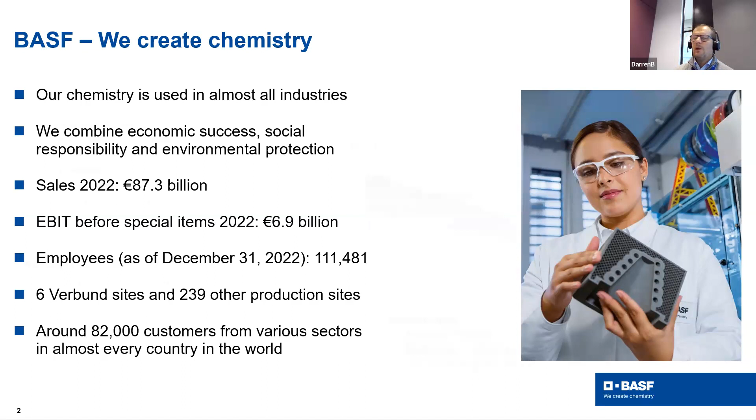So I wanted to start with the history of chemistry and the chemical industry. Chemistry has always adapted to the raw material changes that we've had. Pre-industrial, we had soap from soda ash, potash from burning plants, and then early industrial chemistry with coal, making ammonia from synthesis, and we're making ammonia and hydrogen today from different sources. Then post-war, crude oil, moving into the fossil fuels, and now natural gas. And what do we want for the future? We're talking today about changes away from fossil fuels into renewables: hydrogen, other renewable carbon resources, the energy transitions Jeremy talked about, nitrogen fixation, and which are the right technologies.

And I think Jeremy summed it up at the end: how do we know we're on the right path? So like Shell, BASF is investing in many different technologies because we don't know which one's going to be the winner in these energy transitions and defossilization. There's a lot of early stage research to see how we get to net zero by 2050, and which technologies are going to be there. It's that adaptability to raw material changes. The chemical industry has always gone through it over the last 150, 200 years, and we'll continue to adapt to meet the requirements that industry wants.

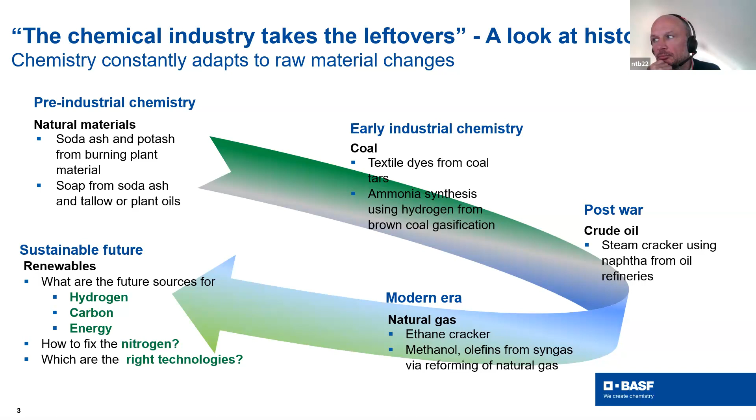And why have we done that? As you see here, synthetic indigo dye was the founding of BASF, right through the different chemistries I talked about: dyes, fertilizers, plastics, healthcare, and moving into different system technologies. How do we move away from fossil carbon into maybe renewable carbon, and how do we meet the challenges we've got? We have 8 billion people on the planet: how do we feed them, clothe them, make sure they have clean water and everything to live in the world today, while also meeting the environmental challenges and using chemistry to do that.

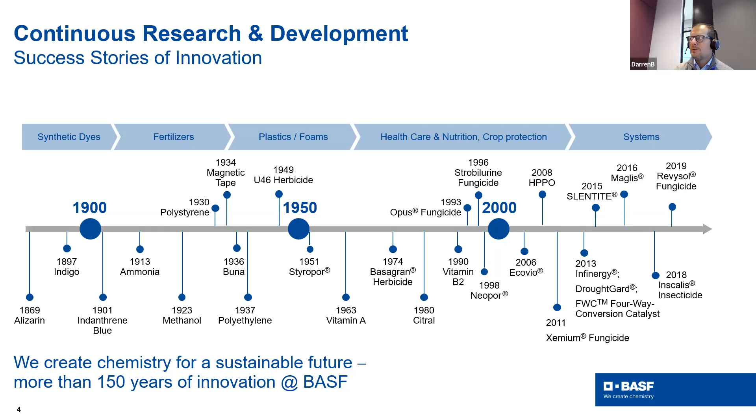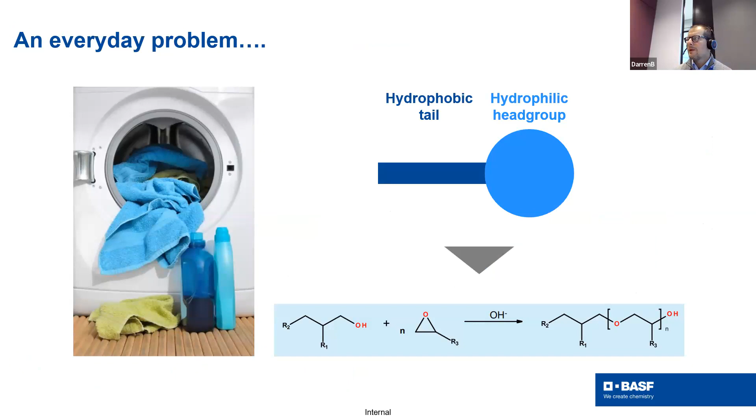And that's a really, really big challenge. And what I wanted to show is this as the everyday problem. So here we have a cleaning liquid, which contains a surfactant, hydrophobic tail, hydrophilic head group. And where does that come from? What are the processes that it comes from, and the challenges that we have to meet in our supply chain? And so those surfactants are solved via highly complex value chains that we have today.

And you see here crude oil, natural gas. And they go through the changes we make in terms of naphtha, ethane, right through to ethylene, propylene, and as we see, right the way up the complex value chains that we have in our production sites. And that's good. And you say, well, how do we replace those? Actually, it is quite difficult because these are long-term, efficient production sites, and we need to then say, how do we then replace the crude oil?

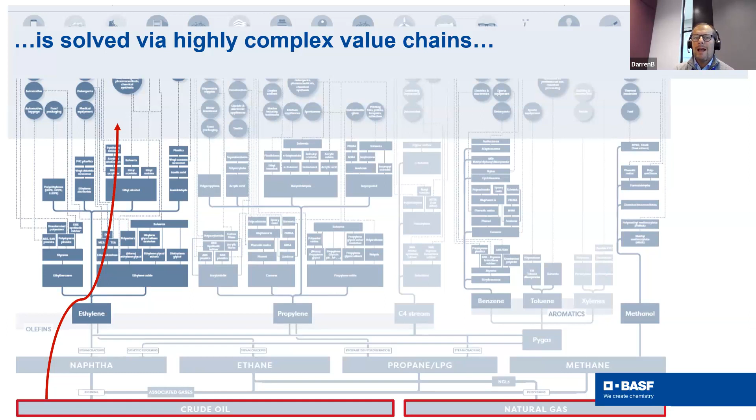How do we replace those value chains across the industry to meet the demands? And actually, it's okay where we do the fermentation technology, but how do you scale that up? And that is a really big challenge. So one of the areas we looked at is those alternative renewable chains. So this is what we call our chemistry.

And on the right, you've got the fossils, the crude oil, the natural gas that comes into the bottom to make the toolbox and the products we have every day. And then we've said, okay, we need to move away, but where can we build those value chains that meet the requirements? And so we have then looked at renewables, and on the renewable side, we've got the carbohydrates, the proteins, the triglycerides, and actually they're good, we can replace, but can you do it at volume?

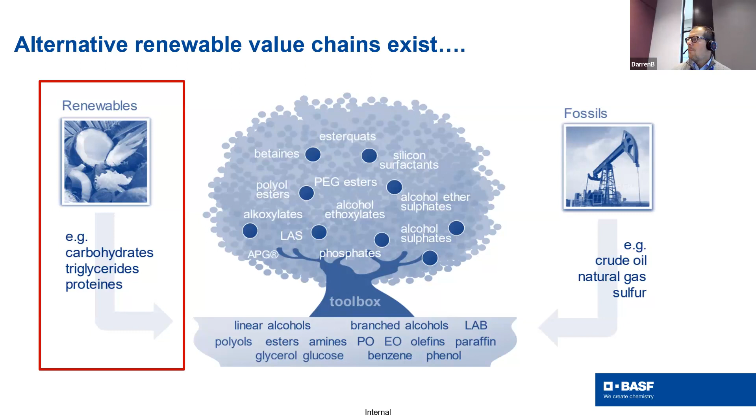And when you're looking at that, palm oil and other renewable resources have their own challenges. These are natural products, and they need to prove the efficiency. So can you make these processes as efficient as the fossil fuel that we have today? And they're the challenges. So to meet all of those in terms of the conservation, the traceability, making sure that we don't take away land that we need for food, how do you transport it, how do you protect the environment. And so these are all challenges that we have in terms of the defossilization within the chemical industry that we can meet.

So our processes, as we showed in one of the first slides, have been built up over 150, 200 years, and are very efficient supply chains. And now we've got to say, actually, how do we take that apart, or how do we then make sure that we can meet the requirements of the world, but also in a sustainable way, and actually at a cost that people can afford.

And this is the three-legged stool. So one is the environment, so we make sure we protect the environment. The second one is the social aspect, so the people. And the third is actually we still need to make money to reinvest in the new technologies. So those three areas have to be filled. And if one of those legs of the stool is not fulfilled, then we're not going to make those processes.

So from a BASF perspective, in terms of our Verbund sites, how do we replace? You've got the four big areas of mobility, energy, waste, nutrition that feed into our processes. And at the top, you've got our traditional crude oil, natural gas, coal, and how do we then move away? Because they make the chemicals that we have today, can you replace them with the products I said before, the plant oil, the cornstarch, but then are you taking those natural materials away from the food chain?

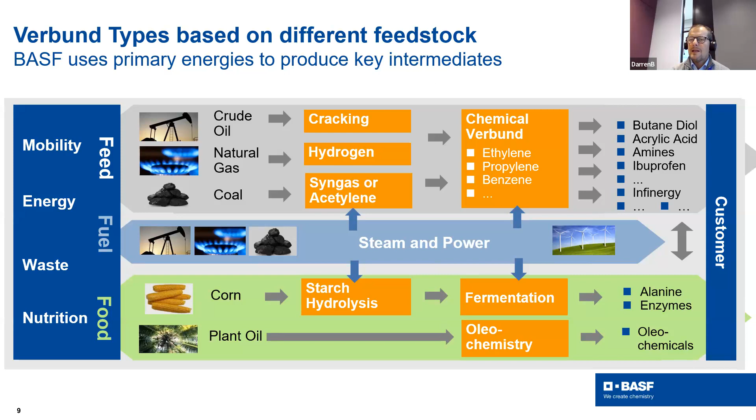And an example on fermentation is we built a bioacrylamide plant at our site in the UK. That was a 25-year changeover from the acrylamide that we had into bioacrylamide. It started at a university in the UK, and it took 25 years to actually get up to full-scale production. And we can't afford to wait that long through these new value chains. So we have to be faster, we have to spend more money on it, and we have to then get our processes as efficient as the current chemical ones that we're using today.

So some of the areas we're working on, and everybody is looking at these areas. So waste is a big one. So defossilization, so looking at municipal or industrial waste, how do you collect it? So we're working with the big waste companies in terms of how do you collect it? How do you sort it? What is the regulation behind that? And that is a big one, and where is the value?

So people are saying waste is the new oil in terms of the cost. So a lot of people are looking into the waste and saying, what can we do with it? Can we then use it as a pre-treatment? Can we mechanically recycle it and bring it back into the market? Do we, as Jeremy said, use pyrolysis to get the pyrolysis oil and the gas, or if we have to incinerate it, which then, from a UK perspective, by 2028, plastics cannot be incinerated anymore, so you have to then find other ways of recycling.

Can we take the CO2 from those processes that meets our requirements and demands? So all of these come into ways of finding new novel materials, but also replacement materials for virgin fossil fuels. And it's then working with the technologies and developing those technologies at speed, whether it's in-house or at universities or partners working with the likes of Shell and along the value chain with the waste companies, to make sure that we can meet the requirements that we have to fill our plants, that we can then provide the products to customers at a price that can be afforded.

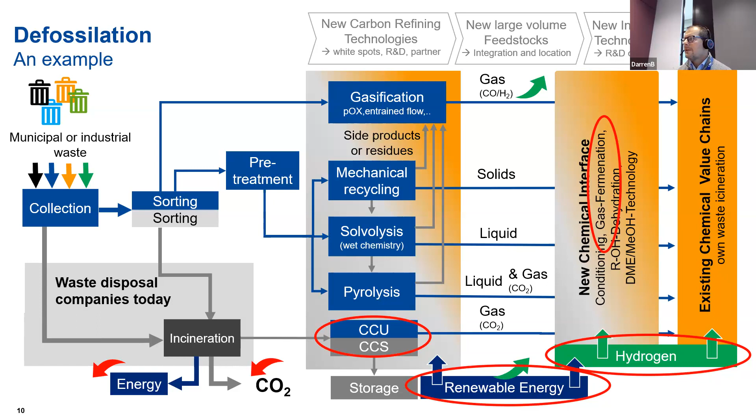And in terms of scale, this is our site in Germany. So this is our biggest fully integrated production site here. So it's ultimately efficient. It sits 7 kilometers along the Rhine. It's 2 kilometers at its widest point, and the land that we have here is fully utilized. So if you want to put a new production site, you have to then tear something down.

And everything is integrated. And the reason why it's Verbund is that the raw materials go into one unit and make a product, the byproducts go into another unit to make a further product, and it feeds all the way through the site to make the final products that come out to feed our customers. And this is where the complication is. So if you've got a 1 million ton a year steam cracker, how do you replace that 1 million tons with renewable resources into the value chain?

And that's the difficulty that we have, and the challenge is you have to then have enough energy in that steam cracker. So can we replace the natural gas that's used to burn and crack the naphtha? And then do you have enough renewable carbon that can go into the steam cracker that can make our products to fulfill our requirements at a cost that we can supply into the market?

So these are all the challenges that we have, and we have to find new novel processes, whether it's from wind power for the electrons to make hydrogen, green hydrogen into ammonia that can be then used for our products, or is it from pyrolysis oil, or projects that we have like Flue2Chem in the UK, where we're taking waste CO2 and working with a number of partners, the upstream industries, so the likes of Tata for the CO2, the paper companies for the CO2, working with Johnson Matthey for technology, Croda, BASF, right through to make the chemicals for the likes of Unilever, Procter & Gamble to make their cleaning liquids.

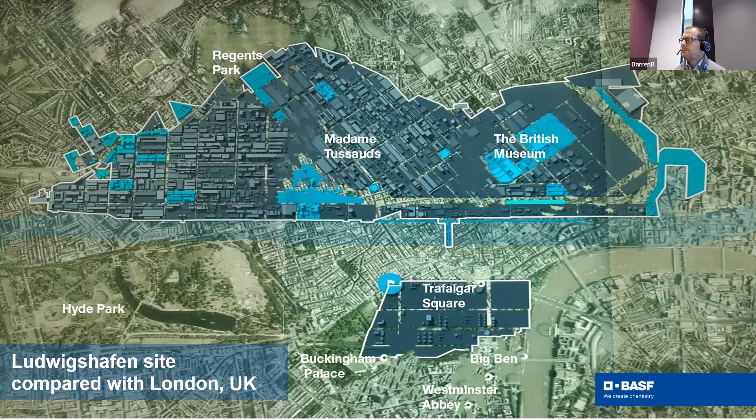And then I'll leave you with our strapline: we create chemistry for a sustainable future. And we go back to what we had before in terms of all of our 158-year history, looking at that. How do we use chemistry today to meet the demands that we have? How do we have efficient processes and move away from those chemicals and develop new materials, new processes to meet the world's requirements?

Thank you very much, Darren. That was an excellent talk. Described succinctly the resilience of the chemical industry in the past, and also illustrated the resilience of the chemical industry, in particular BASF, in the future.

There's a question in the chat that we'll go to. Thank you for the insightful talk. How many years were developing the site at Ludwigshafen? Was that the first site? That was our first site, yeah. So that was where BASF was founded. So it's 1865. So that's 158 years, if my math is right.

Okay, yeah. And following on from that, how many products flow out of that site? That is our main site. So there's probably, trying to think, probably 5,000 products, probably 6,000 products from that one site, different products. And they're all interlinked as well.

Okay, moving on to our final talk, and this is from Bhavin, and Bhavin is going to present on making chemicals from CO2, the future of electrochemical CO2 conversion.

Okay, can you see my screen? Yes. Okay, great. Okay, just give me a second.

Right, okay, so today I'll be giving you an overview of this exciting technology on how to use electricity to convert CO2 back into valuable fuels and chemicals. But first, I just want to give an overview of the work that's being done at the center. So the center here is composed of academics from these 8 universities, and we work on diverse areas with the overall goal of trying to achieve a more circular resource flow for the chemical industry.

And we have research in different themes. For example, one theme is the fundamental technologies that will convert waste back into valuable chemicals. For example, we have a team working on biomass conversion, either to syngas or to other oils and chemicals. We have a team working on plastic conversion, where we take in waste plastics with input of hydrogen and convert them back into their original monomers or bulk chemicals like liquid oils. And the third part is electrochemical CO2 reduction, which I'll be talking about in more detail today.

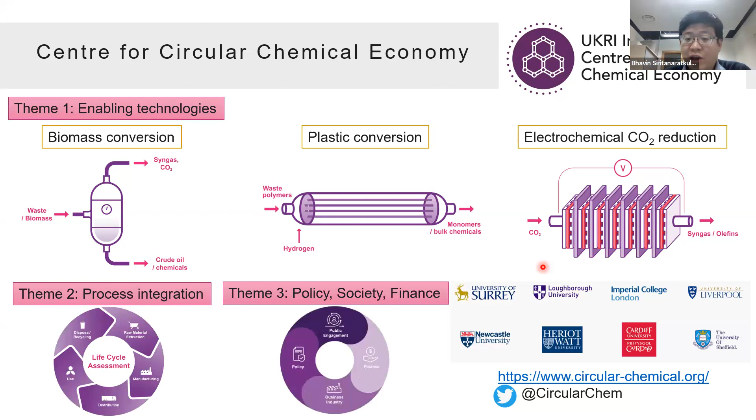But apart from these, we also have teams looking at a larger scale, say looking at process integration, life cycle assessment, how all these processes fit into the industrial processes, how do we optimize these systems, what are the costs, what are the environmental impacts. And finally, we also have a theme working on the even larger scale of policy, society, and finance. Today, the technology that I'm going to be talking about is electrochemical CO2 reduction.

So here we've got CO2. It can either be captured from a concentrated source like industrial flue gas, or it can be directly captured from the air. And you have an input of energy, hopefully renewable electricity, and you feed it into a CO2 electrolyzer. Hopefully you make fuels and platform chemicals. And I'll go into the details in the next couple of slides.

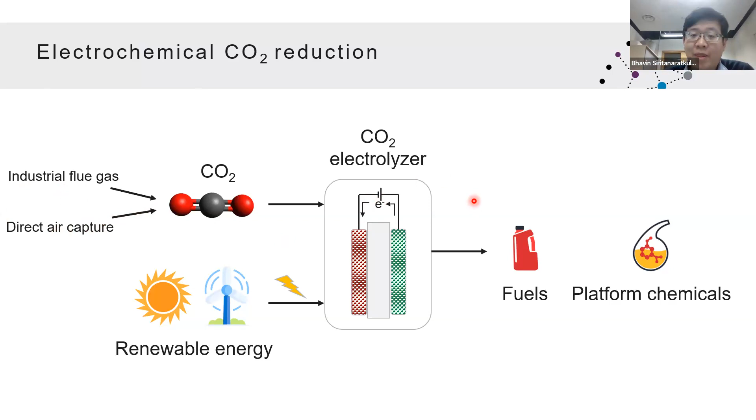But first, I just want to note that all this will be available in the future because renewable electricity is becoming cheaper and more available. So here on the left, I'm showing the cost of renewable electricity for 4 different technologies, as compared to the cost of making electricity from fossil fuels. And as you can see, in 2010, only 13 years ago, the cost of renewable electricity was so high that it wasn't competitive. But in just a little bit more than a decade, the cost has come down to be competitive, or in some cases slightly cheaper than making electricity from fossil fuels.

And on the right, I'm showing the annual capacity expansion. So the blue bars are the added renewable generation capacity each year, and the gray bars are the non-renewables. And the red is the percentage of those that are renewables. So for the last year, and this was actually slightly surprising to me, more than 80% of new power generation is by renewables, and that's a very good thing.

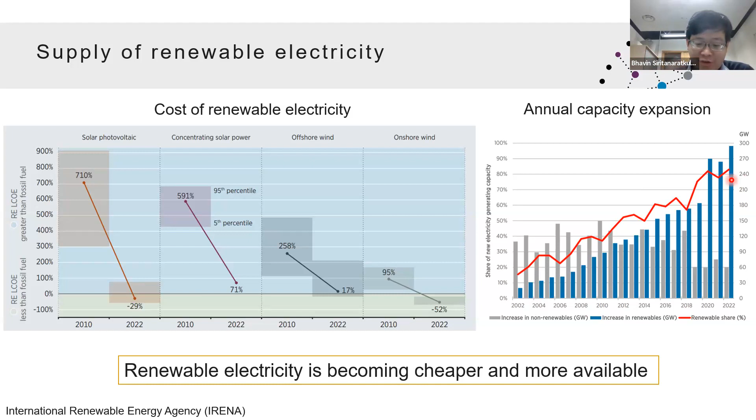Okay, so if we've got plenty of renewable electricity, what kind of products can we make from electrochemical reduction of CO2? So here I'm showing a selection of products. So on the left, we can make formic acid or carbon monoxide. These are more simple to make. These only take 2 electrons. And so they're more simple, and the technology is more developed.

And as we move along, if we add 6 electrons, we can make methanol, 8 electrons, we can make methane, and these are a bit more complex to do. And then on the right, we have C2 products like ethylene and ethanol. And these take more electrons, but they're also more difficult because now you need to activate 2 molecules of CO2 and have them react together to form a C-C bond.

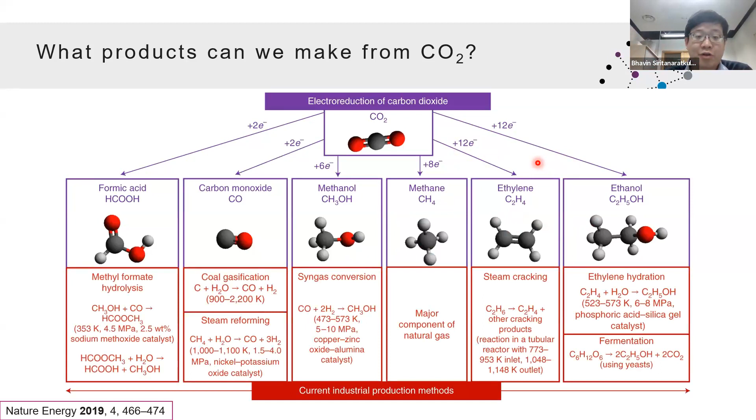And all these are valuable bulk chemicals in the chemical industry. And mostly they're generated from fossil fuel sources at the moment. For example, carbon monoxide, which is part of syngas, is currently made from either coal or from methane steam reforming. Methanol is made from syngas, and ethylene is made from steam cracking. So it'll be really useful if we can replace all these processes with chemicals that are made from CO2.

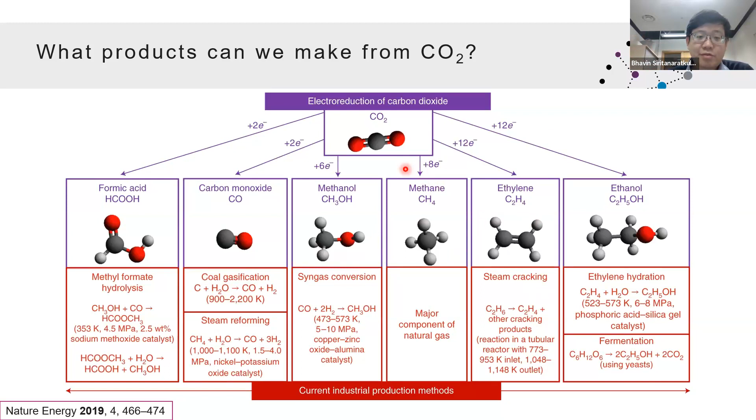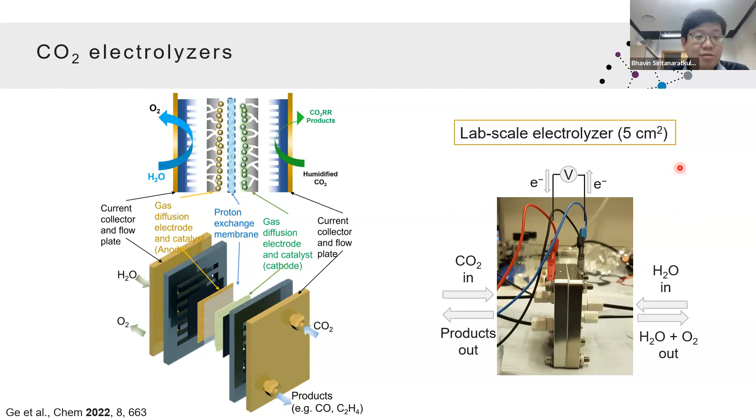Okay, so I just want to give a quick overview of where we are now and where we want to be in terms of performance metrics. And here I'm comparing rough numbers of the current best technologies to some targets. And I'm basing these targets on some other mature electrochemical technologies like water electrolyzers. And there's different metrics you can look at. For example, there's the rate, which is measured as current density. And we can reach a relatively high number with the current best cells.

And there's selectivity or Faradaic efficiency. What proportion of your input electrons is going into making your actual products? And depending on your catalyst, we can get really selective catalysts. For example, with silver, you can get more than 95% selective for CO. With tin, you can selectively make formate. And with copper, you can make up to 75% ethylene.

And so for energy usage, you can look at the cell voltage or the energy efficiency. And for cell voltage, the lower the better, right? This is the voltage you need to apply to get your cell to run. And in these areas, we still need to improve the cell voltage a bit. We want it ideally to be under 2 volts, and we want the energy efficiency ideally to be at least about 80%.

And you can also look at the CO2 utilization, how much of your input CO2 is actually going into your target products. And depending on the cell design, some of this CO2 can be lost as carbonates, which will require more energy to recover and regenerate. So this can vary wildly depending on the cell design. But ideally, we want CO2 loss to be as close to zero as possible.

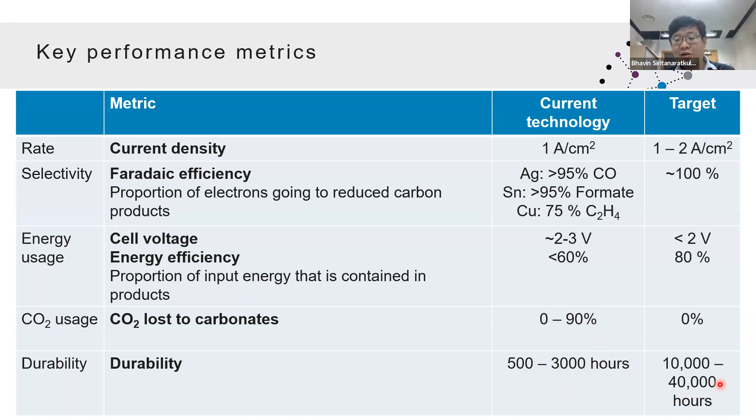Okay, so I want to introduce some research that is going on at the center here. So we have a team in Loughborough led by Professor Eileen Yu, and this work is done by Dr. Preetam Sharma, and they focus on designing new catalysts to control the selectivity. So here they investigated a mixture of copper and tin.

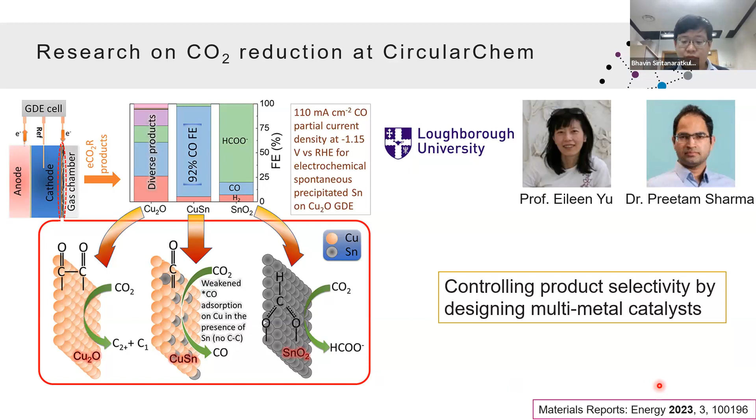And for more details, they've recently published this paper this year with more detailed characterization and measurement at different operating conditions. Here for my own work, I'm part of a research team at the University of Liverpool, led by Professor Alex Cowan. And here we're looking at a different facet of the problem. We're looking at cell design, designing cells to have low CO2 loss.

And what I mean by that is, conventional cells that we are trying to replace have this problem that if you put in a certain amount of CO2, only a tiny amount is actually going to your carbon products. The majority is lost as carbonates or as crossover CO2. So we want to replace this. So we've designed a new cell using bipolar membranes, and this will prevent any crossover or loss of CO2. And hopefully this will translate into higher yield of your target carbon products. And for more details, you can check out these publications here.

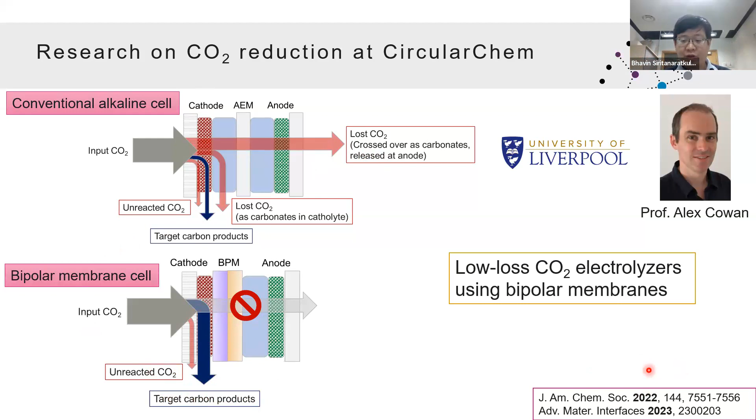So the takeaway message I want to give is, if you have CO2 and you have renewable electricity, you can use that to make valuable fuels and chemicals. And if we want to move to an industrial scale, we need to think on different scales: from the smaller scale, designing different catalysts, then designing the electrolyzer cells that the catalysts fit into, and finally designing the overall processes where these electrolyzers can fit in.

And for the different metrics that we're looking to improve, I think the key ones that we definitely need to improve are the cell voltage, the CO2 utilization, and the durability of the systems.